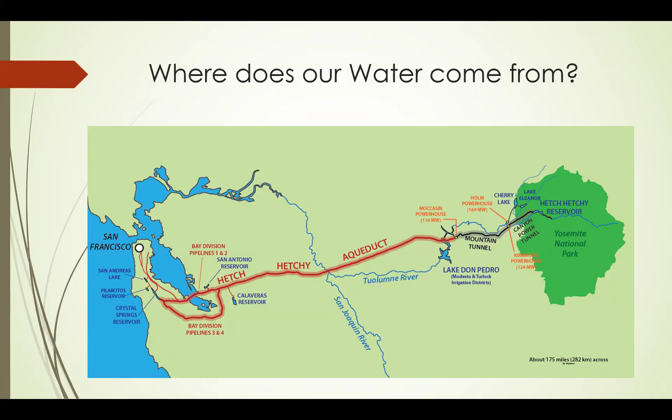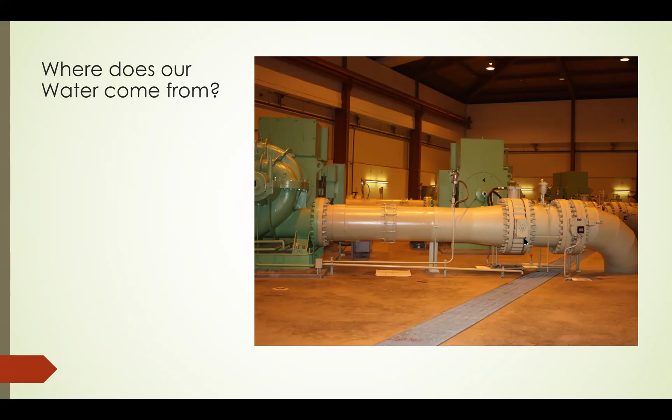The other place that we get water is we pump it out of the ground. So half the water used in Santa Clara County is pumped, coming from the ground. That's a good and a bad. The 1930s is when we started to pump water. We'll talk about the good and the bad in just a minute.

We also get it from this. Anybody recognize that? Rain. How much do we get? Barely anything. Who said 18? Pretty close, 16.71 on an average year. Water varies from north to south. San Diego gets about 6 inches of water a year, the driest in California as we go down towards Baja. Up north, 121 inches. So we're at 16.71 inches of rainfall for our area.

We also get it from the snowpack. Snowpack isn't doing great. Snowpack is our water bank, essentially, so that water melts and is afforded to us in May, June, July as the weather heats up. With climate change, we're seeing the snowpack declining at a higher and higher rate.

Good news, bad news. Any builders in here? Builders don't understand that we ran out of water five years ago. Do you know the city of Burlingame is doing 3,400 new homes because of federal mandates? How many is San Mateo doing? 7,000. And we don't have the water to support that. It's not funny, why am I laughing?

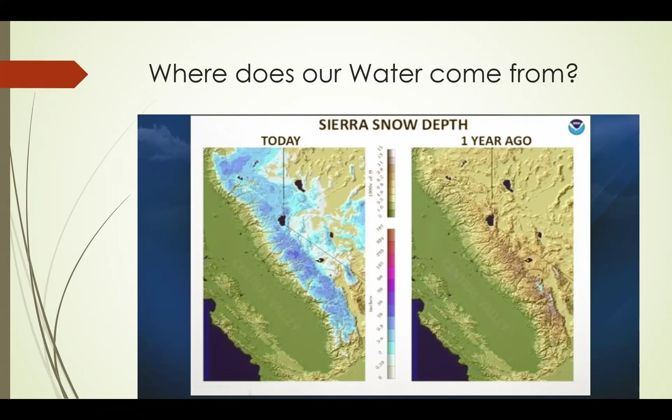There we go. So when you flush, by the way, how many times a day do you flush? You ever count it? Why not? That's drinkable water, you know. If the Hetchy system failed, you would be dipping into that toilet because that's all you got.

So you should be mindful of how many times a day you flush because it's important. San Mateo and Foster City just spent $51 million to upgrade, and it probably overran by a bit too, to upgrade the system over there on 3rd Avenue.

It's a state-of-the-art system, and they're doing secondary cleansing, I think. They're not doing tertiary. Redwood City is the only city that does tertiary, which means that it's clean. So when you flush, it goes to this treatment plant and they clean it up. They have activated sludge, secondary clarifiers, filtration systems. It's a very complex system.

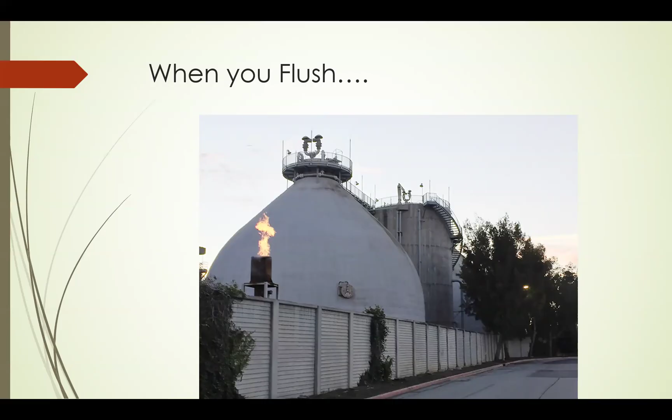Disinfection, dechlorinization, screening, thickening, anaerobic digestion, centrifuge dewatering, and biosolids reuse. There'll be a small quiz on that later, by the way. And where does it go? It goes right there, goes right into the bay. Does that make sense to you? Why?

We should actually be using it. So in a number of areas, we have what is called purple pipe. Purple pipe is water that's been cleaned, usually to secondary treatment, and it's used in a lot of landscapes.

If you're ever down by Santa Clara, the amusement park down there, Great America, they use all reclaimed water, all of it. It does have a little bit of a problem. You'll see the ends of a lot of the plant leaves that are crinkled, but it does work.

I think a lot of the cities are rethinking their water plans right now. I'm working with the city of Burlingame on their water plan. Enough said about that.

So Burlingame had a sewage treatment plant. What does that do actually? It's right next to the dog park, so I go there all the time. Same thing that it does in San Mateo. It cleans. Every time you flush, that's where it goes and they clean it, and then it goes into the bay.

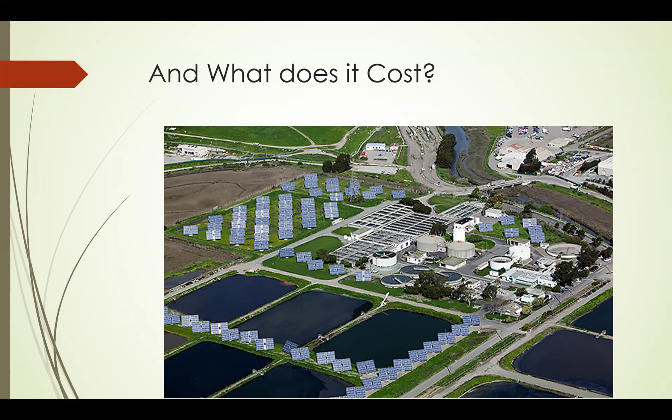So what does it cost? In 2020, this was a $27 million build for this. And so when we look at the cost of this stuff, why doesn't the city give it to us?

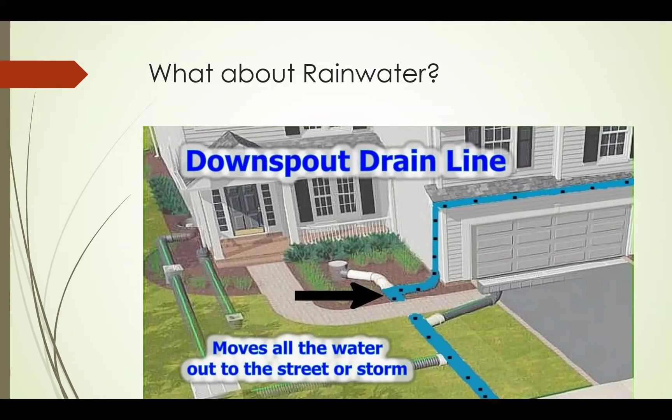So when we talk about rainwater, we need to understand something about rainwater. We treat rainwater as wastewater by choice. If you look outside the door, there's a couple of downspouts on this building, and it's going into a drainage system and disappears.

The cities are changing the laws. A lot of the cities are saying that you need to keep water that's on your property. This scenario where we're picking up the downspouts and dumping it in the curb is treating rainwater as wastewater by design, and we can't do that anymore.

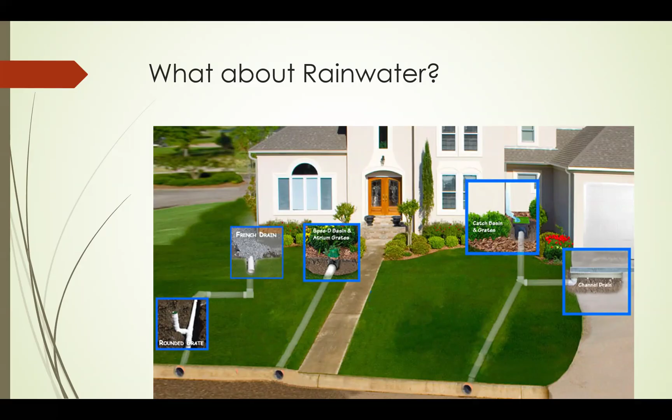A lot of people justify it saying, well, I need to protect the envelope of my house. Yeah, I get that, I understand that. But you need to understand a couple of things: the city needs to do something about that rainwater, and it is expensive to do stormwater management. Cities do not like to put in new storm drains because they're extremely expensive, and you got to maintain them.

The first rain of the season, everything goes into the storm drain: plastic cups, bottles, crap. You see these big Vactor trucks driving around trying to keep the stormwater drains clean. The first rain is an ecological disaster. All the oil from our cars, glycol from the radiators, everything that got dumped out there, somebody clicks the gas nozzle too much and gas spills at the gas station, and you see it all the time. All of that goes into the storm drain.

It's wastewater, and the city has to deal with it.

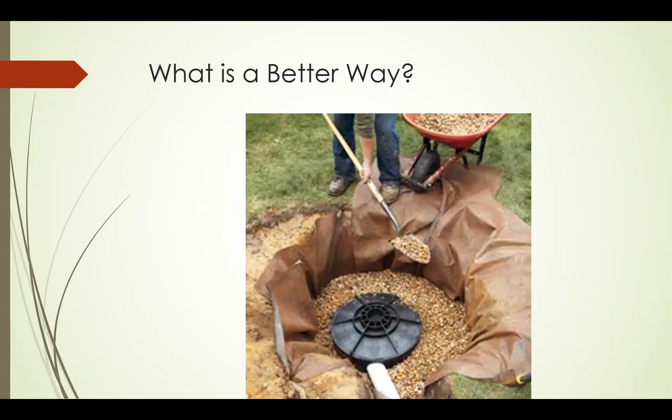So what is a better way? Well, this is a dry well. Instead of taking the downspouts off of your roof and dumping them into the street, this uses a dry well to dump the water into the aquifer. This is a way better way. So you put in patio drains, eliminate all the puddle areas, floor drains, gutter downspouts, all of that stuff, and it goes into dry wells.

A dry well is essentially a gravel pit, usually 4x4. You leave about 1.5 to 2 feet on top so you can plant on top of it. But that water goes into that dry well. Where does it go from there? Well, it goes down into the aquifer.

Why is that important? We're pumping water out of the ground, and we had that big, you probably have seen it. Could you repeat my question for the Zoom too? What is an aquifer? Aquifer is where we get our water. It's an underground reservoir, it's well water.

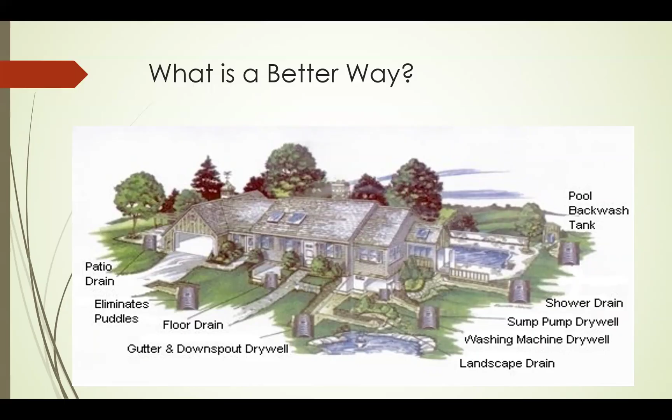We've got that big bunch of water out there, the Pacific Ocean. So when you pump, what happens to the vacuum? Nature abhors a vacuum. So the water from the Pacific Ocean comes in, and it's brackish, and it's contaminating the aquifers. So if you're doing dry wells, you're helping to push that good water down into the aquifer so that it does not contaminate.

You had a question? Is the 4x4 gravel pit sufficient size for an average house? No, it's not. What do you recommend? Could you repeat that question for the Zoom people? Is 4x4 adequate for an average house for a dry well? It is not. Yeah, you need a series. There's a number of formulas.

I taught a class on harvesting rainwater, and there's a series of formulas that you use to determine how much water you're getting and how you move that water. So you can do what is called a series of dry wells.

If you're doing a new build, the dry wells usually go under the concrete driveway. That's the way we used to build them, so they don't really interfere with the landscape. And we used to put 4, 5, or 6 in, and it depends on the house. We were doing big houses in Atherton, so those guys, you know, they had big dry wells.

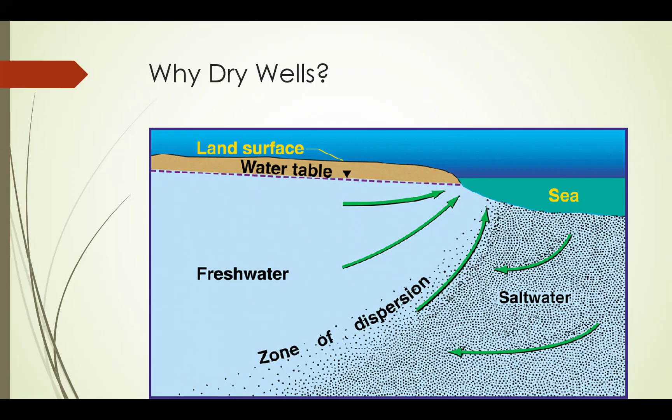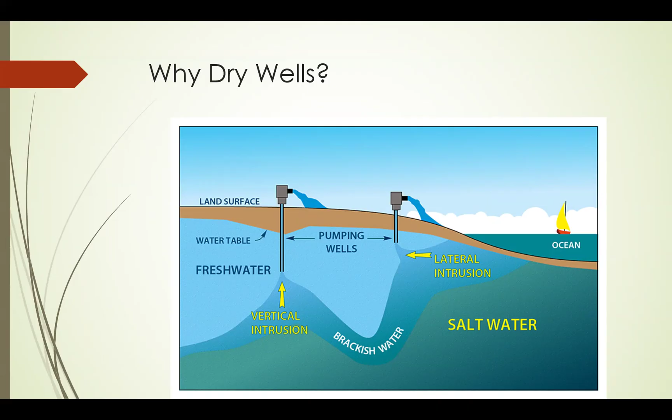But this encroachment is getting more prevalent because we're pulling more water out of the groundwater, and so we need to think about a new way. So another way that they're doing this is they're pumping water back down into the fresh water, so that they're keeping that brackish water at bay. So they're pumping and they're also dumping in these areas.

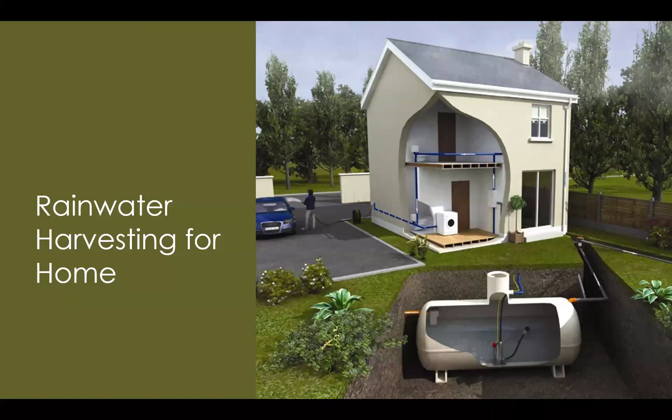So what are some of the alternatives? What are the possibilities that we can do? Why are you here today? Well, there are some possibilities. We could catch it, put tanks in the ground, and reuse it. There's a number of companies who sell these kinds of tanks. They used to be more expensive, but they're fairly reasonable now. And you can harvest rainwater for your home.

Here's large scale. When you say reasonable, like, is it $1,000, $5,000? I was getting them for free. So why was I getting them for free? Do you guys ever hear of a place called Silicon Valley? Do you know they build chips and stuff like that down there? What do they use? They use water. What else do they use that they have in big tanks?

Acid. They clean the chip boards with acid. So they have these tanks. They're huge. But the problem with these tanks is that they expire. They can only do so much with these tanks before the acid has a tendency to break them down. Firefighters get real excited when acid spills all over the ground.

What kind of acid? It depends on what kinds of chips they're making. Acetic acid? No, acetic acid is pretty mild. Might be hydrochloric, might be muriatic acids. There's a number of different acids they use depending on what they're building.

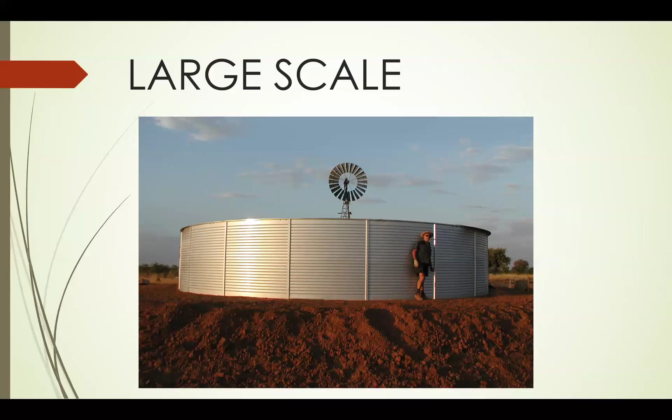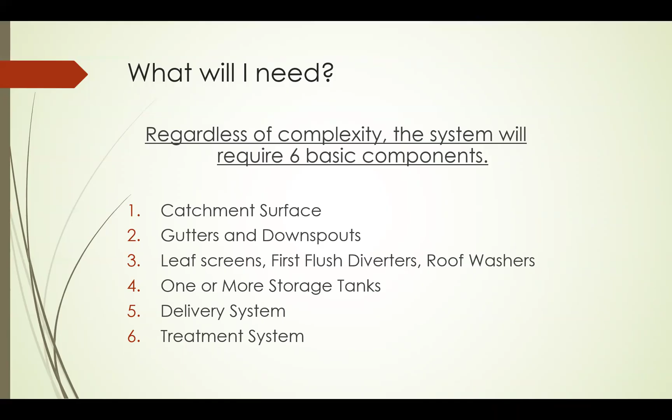So they are harvesting. So what do I need? Regardless of the complexity of a system, I need 6 components. I need a catchment surface, a roof. I need gutters and downspouts, leaf screens, first flush diverters, roof washers. 1 or more storage tanks, a delivery system, and a treatment system if you're going to store it.

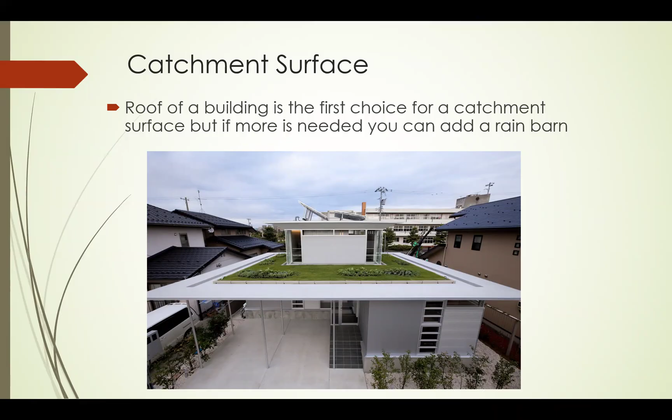So essentially, this is what the roof of a building is. It's a good catchment surface. It'll catch a lot of rainwater. And then once you catch it, you have what is called a first flush. So the water coming off your roof on the first rain is filthy. It's full of chemicals and you don't want it. So you lose it, unfortunately, because it can't be cleaned. And then that automatic diverter shuts, and you need to make sure that that thing stays clean because it can clog. And then you can store it.

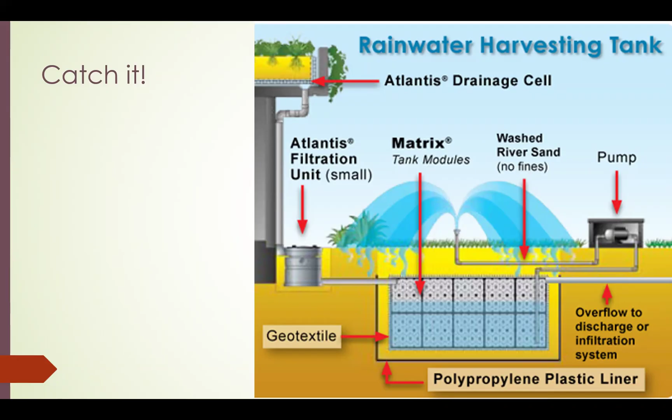So metal roofs. A lot of commercial buildings should be doing this. Are they doing it? I hate to pick on the city of Burlingame, but they just built a number of civic buildings and they're not doing it. It wasn't in the plans.

You're not from the city of Burlingame, right? Just checking. I don't want to make enemies.

If you go to the library in Hayward, they're catching and using all of the rainwater. It was built into the design. We've got to get our legislators and our city council people aware of this. They should be doing this.

What about PVC and TPO roofs? Is that acceptable? Could you repeat that question? So what about PVC and TPO? It will work. It's a type of synthetic polymer used to replace tar and gravel roofs. It is an alternative. It will work. They last a lot longer. Sustainable, yes. They're cheaper to do, easier to install. They're lighter. So yeah, they will work.

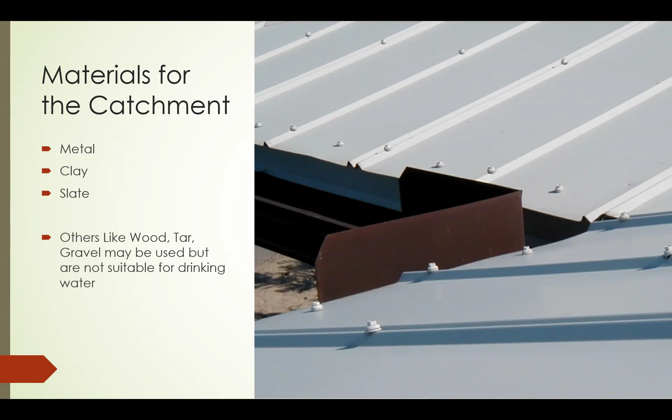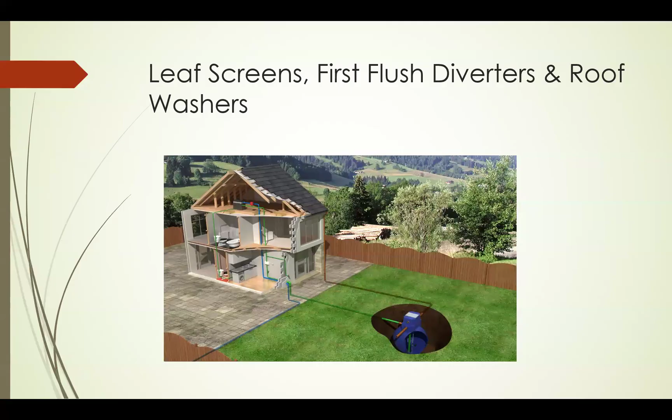A lot of people are afraid of the chemicals that are in these products, but I think we're past that. Corning guarantees that there's no leaching coming off of their PVC. It's inert at that point, so it should work. So gutters and downspouts, obvious. Some kind of leaf screens or first flush diverters, roof washers, whatever you have, just to keep the water clean. So this is a basic leaf screen. They're commercially available. Amazon's got them. Amazon's got everything.

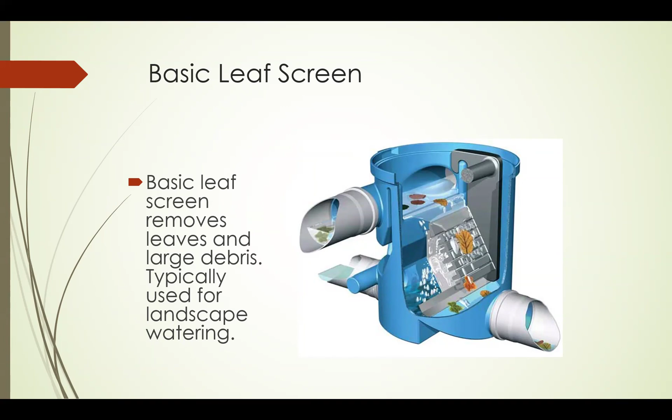And kudos to Jeff Bezos. A lot of people don't like Jeff. I knew Jeff when he lived in the area, and I think he's got a good heart. He means well. And he has built one of the finest companies in the world. If you go to their site, it works. And it works really well. So kudos to him for doing that.

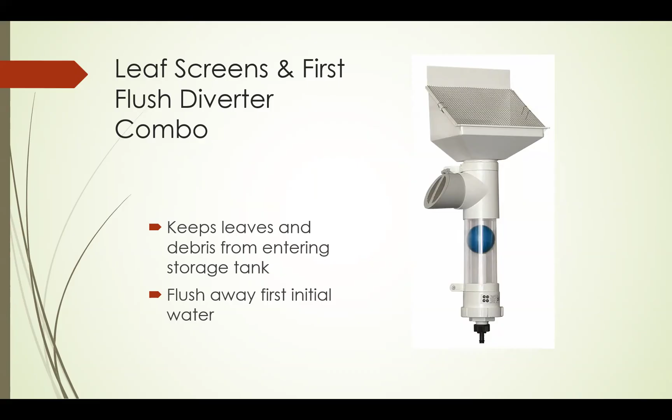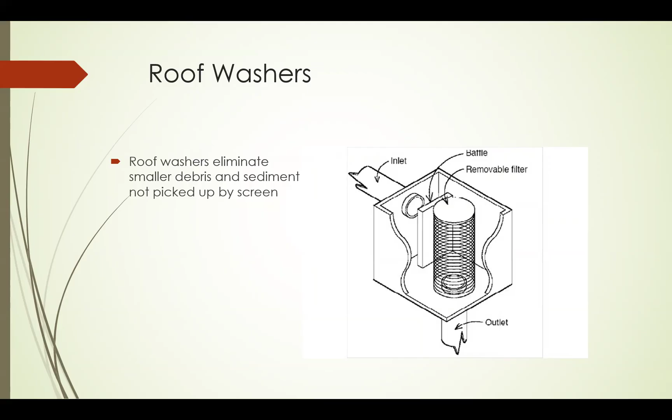Here's a first flush diverter with a leaf screen on it. Keeps the debris from entering the storage tank. The first flush flushes away the initial water, then closes. It's a real simple system and it works. Roof washers eliminate small debris and sediment. It goes in your gutters and works pretty well. And then here's your storage tanks.

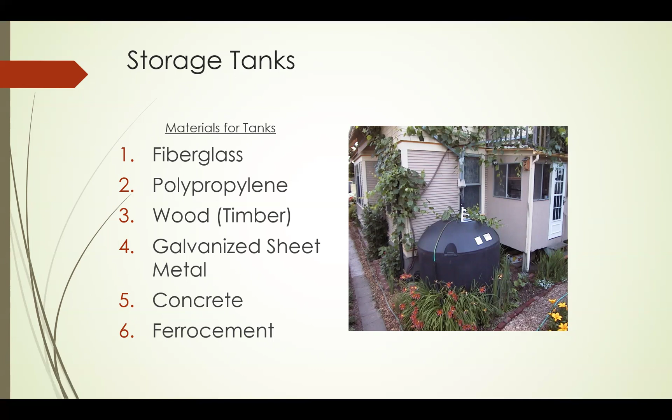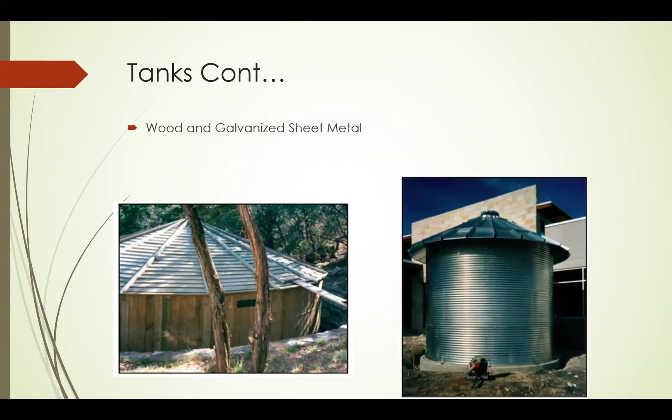So there's a lady here in San Mateo. She has 11 storage tanks in and around her property. She grows a lot of vegetables. And she has them hidden behind screens, shoji screens. She's very innovative in terms of hiding them. And they work pretty well. A lot of different materials for tanks: fiberglass, polypropylene, wood, galvanized steel, concrete, and then ferro-cement. They all work really well. These are fiberglass and polypropylene, wood or galvanized sheet metal, concrete, underground units, all types of different tanks.

We're getting to laundry to landscape, by the way, but I want to give you some alternatives before we get there, because you can't have one approach to this system. You need a number of different approaches to solve this problem. If you've got a laundry to landscape system, that's okay. That's one solution, but you also should be harvesting water off your roof. You also should be doing rain gardens. You should do a number of different things. How many of you take vitamins? Just one vitamin? You take a bunch, right? The approach is diversified. And so is water harvesting. It's got to be a diversified system. And the cities have got to get on board with this, by the way.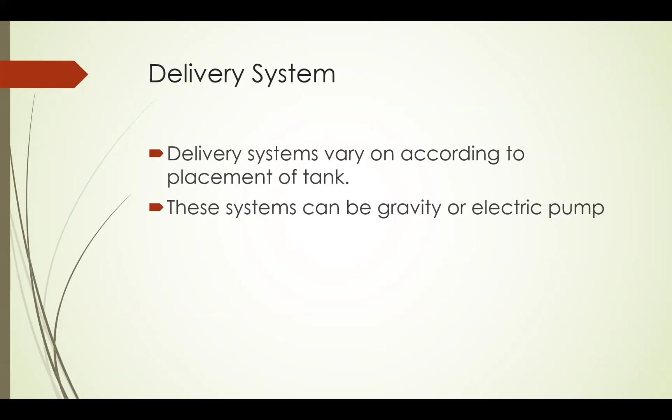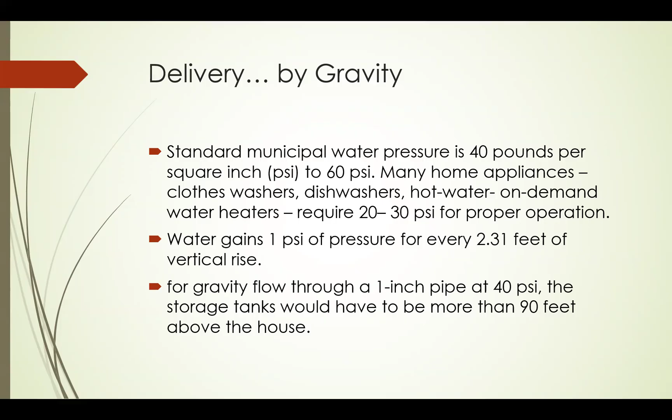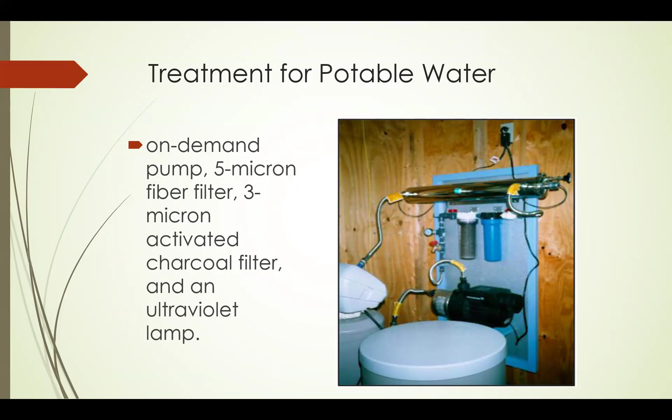They really do. So delivery by gravity, that's the best way to deliver the water. And I'll show you a whole bunch of other things. You can put a pump in, but why when you can do gravity? This is a treatment for potable water. This is an on-demand pump, 5-micron filter, kind of an expensive system. You see this in wells a lot, where they're using a salt to soften the water, etc. Water use. So here's water use around the world.

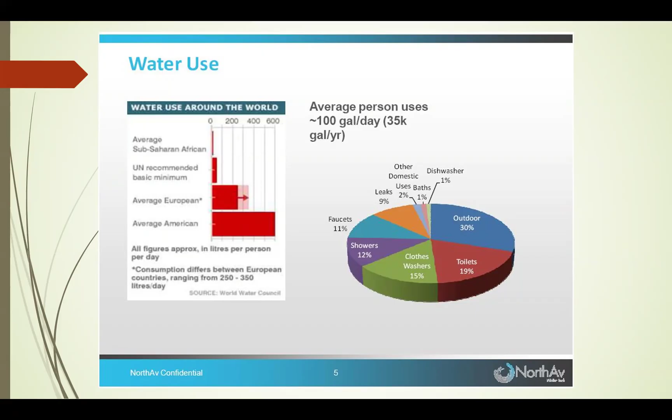Do we live in America? Ooh, how many times a day do you guys flush? Did I ask that question already? And did you answer it? Were you gonna go home and start marking it on your calendars? Average American? That's a lot of water. You got to start thinking about this stuff. You really do. So we could catch it, and this is a real good way to catch water.

Big storage tanks down in the ground. It's going to come to this. Australia is already doing it. The water from the washing machine is coming in. The shower is coming in. Eventually, we're going to have what is called whole house integration, where almost 80 to 95% of the water that you use in your house is going back to your house, including the poopy water.

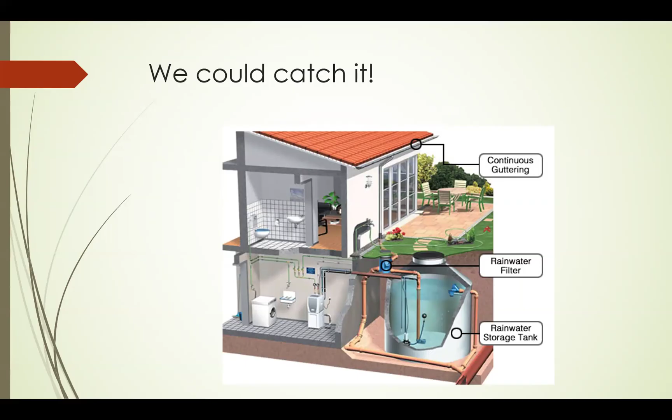It's going to happen. Anybody see the movie The Big Short? Yeah. How much money did that guy make? 1.4 billion. It's pretty close. $1.87 billion. Do you know where this guy lives? He lives in San Jose. Yes, he does. Do you know what he's doing with his money? Water. You ever heard of a guy named Warren Buffett? Do you know what he's doing with his money? Water. Water is the new gold. And if we don't start thinking about water as the new gold, we're going to end up being a consequence of not having it. Because this is reaching a crisis state.

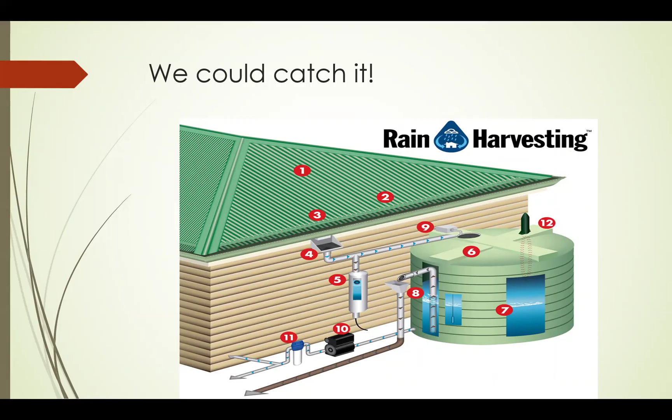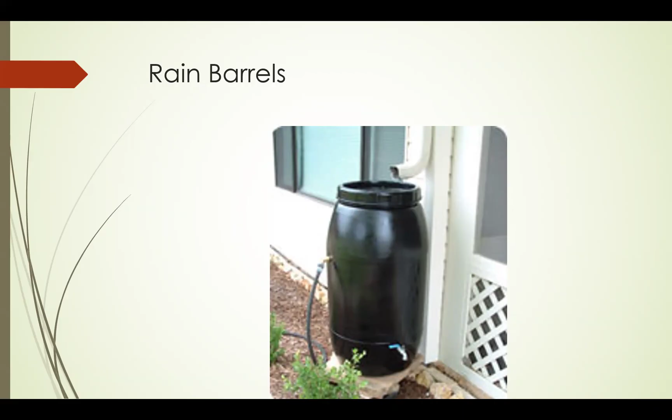Absolutely. So this is a simple rainwater catchment system for a home. It's got a screen here to clean it. First flush diverter, drops the water out. The rest of the water goes into the tank. The water comes out of the tank. They've got a pump here, a filter, and then it's going into the landscape. That's pretty elaborate, but it works. There's a rain barrel, real simple. Bosca offers rain barrels at a discount. They're 32 gallons and they're rather inexpensive and they work.

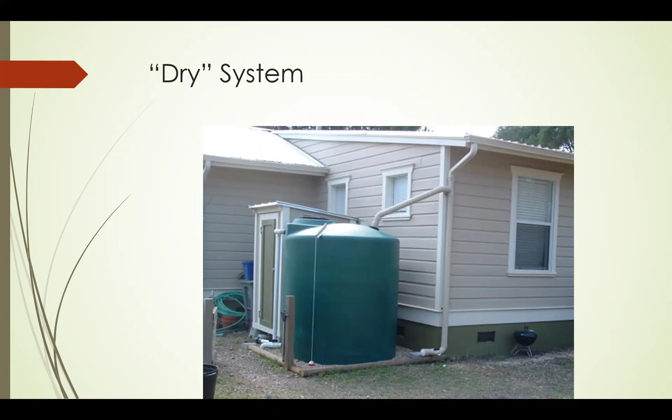This is at that lady's house I was telling you about. This is one of her tanks coming right off the roof. This fills every year, easily. Fills every year. This is a dry system, and the dry system is essentially a collection pipe that stays dry most of the year. When it rains, it dumps the water into the tank and stays dry. So this is a dry system. The storage tank is next to your house.

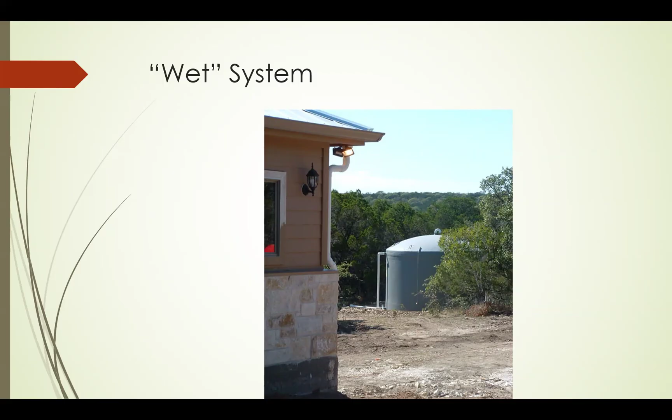This is a wet system in that the storage tank is away from the house and the pipes are underground to get to the tanks. It is a pretty good system if you've got the room for it. Here's another wet system. Problems are not stop signs, they're guidelines. So if you do have problems with these systems, and there can be problems with these types of systems, they're solvable, as most of you know.

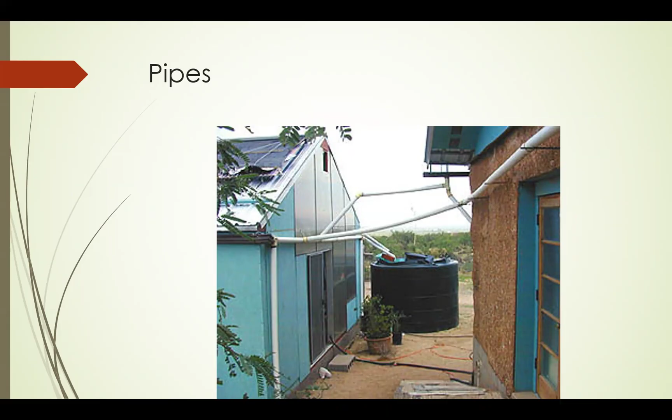So some of the problems are they can be unsightly. The piping in this system should have been done differently, but people in the neighborhood really don't want to see PVC pipe flying from one structure to another. It's unsightly. Will you get a call from the inspector? Yes, you will. You absolutely will. But this is solvable. The other problem that we have is algae.

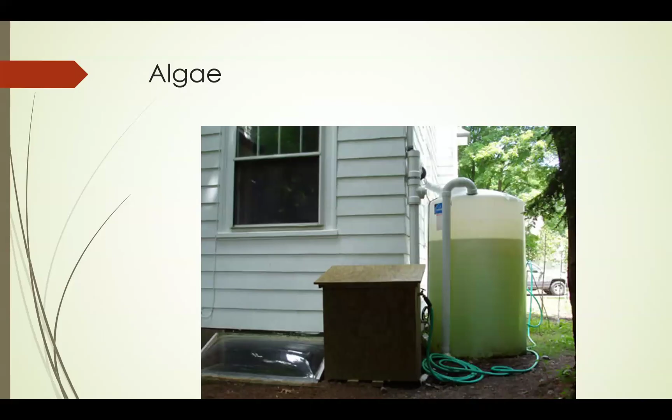So if you have clear piping or clear tanks and you're collecting rainwater, you're going to get algae. You can't treat it. What are you going to treat it with? Clorox? Well, it's going to your plant materials. So how do you beat the algae? Well, you paint that tank dark, paint it black, and you beat the algae. The transparent tanks are meant for chemical storage, not for rain storage.

If you have a gauge, this is a clear tube to tell you how much water is in your tank, you're going to get algae in it. But that's how you tell how much water you have if you want to use this system. What's an easier way to do that? Percussion method. Bang on the side of the tank. Boom, boom, boom, boom. If it's hollow, it's hollow because there's no water in there. Bing, bing, bing, bing. Different sound. So instead of growing algae, you can just use the percussion method.

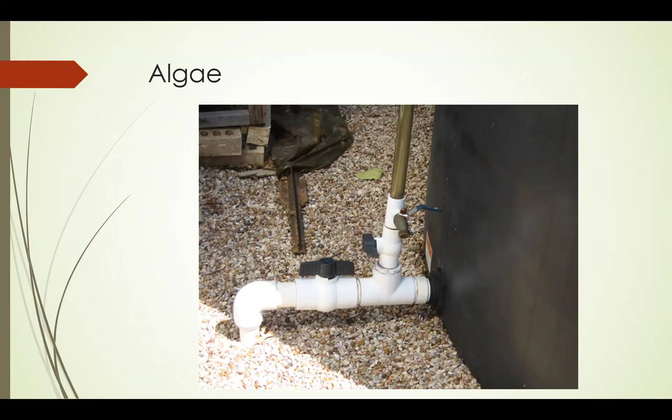Engineers, any engineers in here? Engineers love this system. First flush diverters. The problem with the first flush diverter is that it does clog. It picks up a combination of dust and debris, and it will clog because the first rain has a high amount of dust and particles. So after the first rain, you got to get up there and clean that.

Yeah, go ahead. Back to, I'm not an engineer, but can't you just use like a dipstick, like when you check? Yeah, you can. Yeah, you can use a dipstick to check your water. I mean, it's exactly just that. Yeah, it's real simple.

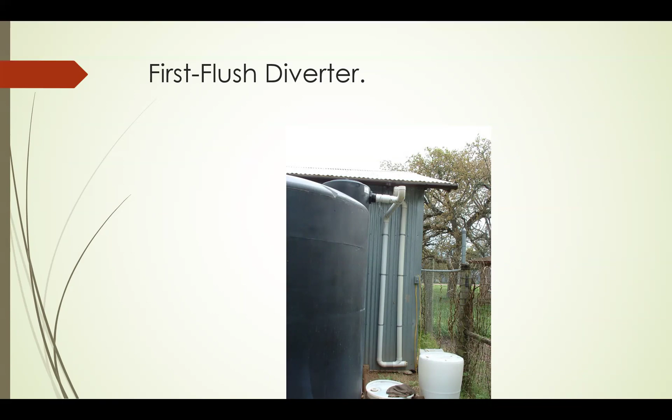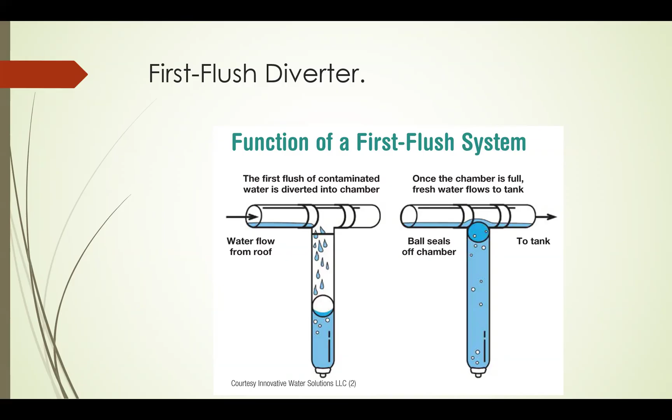So here's how the first flush diverter works. Water flows from the roof, this ball drops down, and as it fills up, the ball stops it and seals the chamber, then it goes to the tank. Real simple, a ping pong ball. You can make one, they're pretty simple. That's how it works. You get a lot of benefit.

I want to talk about rain gardens. The city started doing these 5 to 8 years ago. They finally figured out that if you cut that curb and put the right kinds of plants in, you can irrigate quite easily, and the right kinds of plants is the key. You can also do this in your own home. It's pretty simple to do.

There are plants that are native to the region. Why do we want natives? Based on that environment, why? They'd been here thousands of years. They know the climate better than we do. Have you been here 1,000 years?

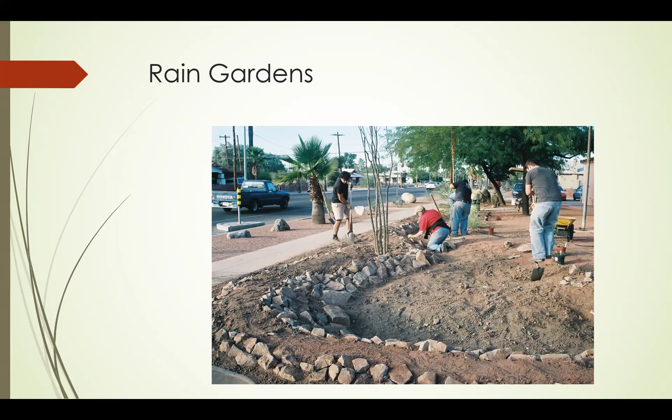So, missing the ET thing. Here's a very nice rain garden. Cities are doing exactly this now, doing a great job with it. They're understanding the importance of not doing stormwater drains anymore. Here's a rain garden, all from downspouts. It's really quite pretty.

So I know that you guys are putting in a rain garden out here. The key to making that successful is to figure out: is it highly inundated, medium inundated, or low inundation? Because that's going to determine the amount of plants you're going to put out there, and the types. What is the inundation? How much water you got, and how long does it stay?

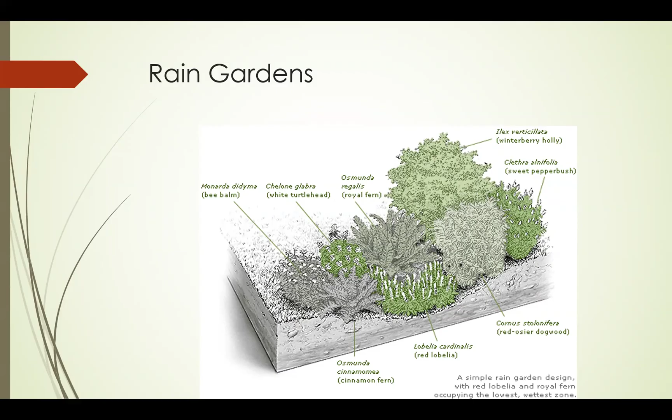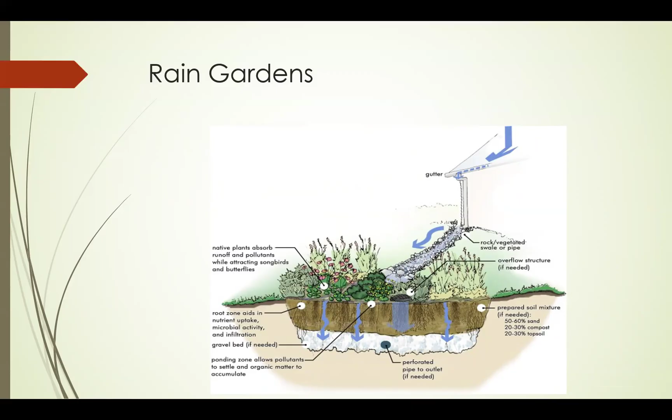So the city of Seattle started green infrastructure for controlling combined sewer overflows. They call them CSOs within the city. So this CSO reduction, they've been able to reduce the CSOs by 30% using this method, which means that stormwater doesn't have to be rebuilt anymore.

I have one question. The picture behind, can you go back? What is that square thing in between and in the middle, the brown square thing? Does it do some kind of air gas or something? It's a drain. If you get overflow, the drain picks it up and carries it away.